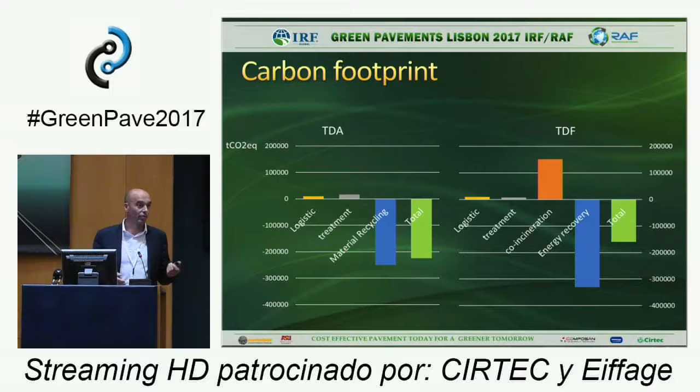So, looking at the asphalt market in Italy, as almost all over the world in the past decades, there have been several attempts with the dry process. Some of them were successful, others a complete failure.

But we can place the date of birth of the rubberized asphalts in Italy at the end of 2007 and early 2008, when the first entrepreneur in Italy decided to invest into blending units and start producing industrial rubber. Since then, we have some rubberized asphalt pavements, and unfortunately, 2007-2008 was not a lucky year to make that investment because of the forthcoming financial crisis that put to an end almost all the works and the investments in infrastructure in Italy. So also because of that, after 10 years, we have just roughly 350 lane kilometers of rubberized asphalt pavement. That's just very little if you think about that.

Anyhow, in the most recent years, the main driver for the market is the need for reducing the noise emissions along the streets and along the roads, and so noise reduction is the main driver for the market. And that's why also several companies now are promoting and placing on the market their own mixtures and hot mixes and products, rubber-based products that aim at reducing the noise emissions on the road.

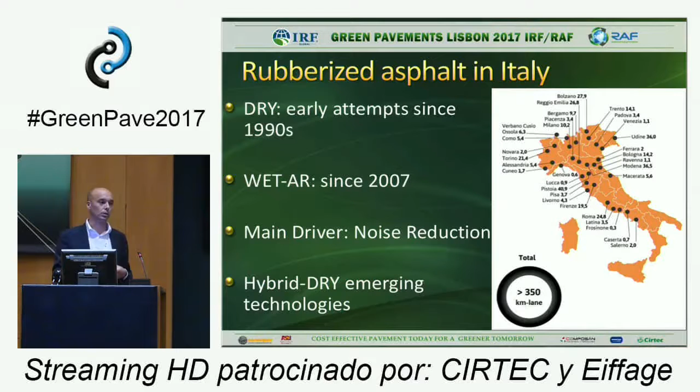And especially a hybrid dry technology is emerging and is spreading, replacing in several places the old wet technology. So the hybrid dry means the use of polymer modified bitumen and fine powder in a dry way. So, as I said, honestly, in an ideal world, I would prefer to have a decision maker that takes decisions not only based on the need of the noise abatement, but in a cathedral thinking way. I mean, looking at the life cycle and cost assessment of an investment.

And so that's why we took the opportunity to commission to a laboratory the assessment of the state of service of one of the first roads made with asphalt rubber in Italy in late 2007, early 2008. That was a successful story in a way, an Italian successful story, because at the time between the tendering and the execution of the works, the price of the bitumen had skyrocketed, and the contractor could not provide to the administrators the right quantity of conventional hot mixes without losing money.

And so at that time they decided to change the original design that was a conventional one, a very thick one, 25 centimeters of hot mixes, and proposed to adopt completely the asphalt rubber philosophy, and so they used thinner layers, 7 centimeters of gap graded hot mixes, plus a stress absorbing membrane interlayer with rubberized asphalt on top of a cold recycled base layer.

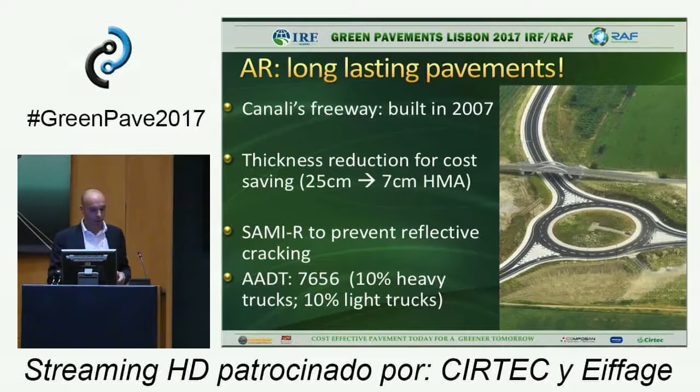So that way the company could make some little profit also on that work, and even though they didn't care about environmental sustainability at that time, the further calculation made it evident that 40% of the CO2 reduction was achieved by reducing the quantity of materials that were used, new aggregates that were not used, and so forth. So on the left hand you can see the new rubber-based design in comparison with the right-hand column that described the original design that was a very thick one.

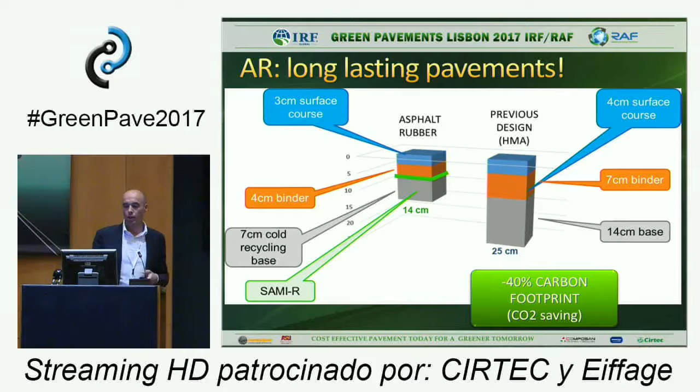So as I said, after 7-8 years we went back there in order to monitor the state of service of that road, and here you can see a picture of how the top layer of the material looks. Also today the mastic is still quite evident. It seems quite a new road, and in fact there was no cracking, no rutting, so the Americans were not telling tales, it was all true, all real. And based on the mechanical analysis of the samples that were taken, and falling weight analysis and skidometers and things like that, the performance was similar to that of a new road, so excellent.

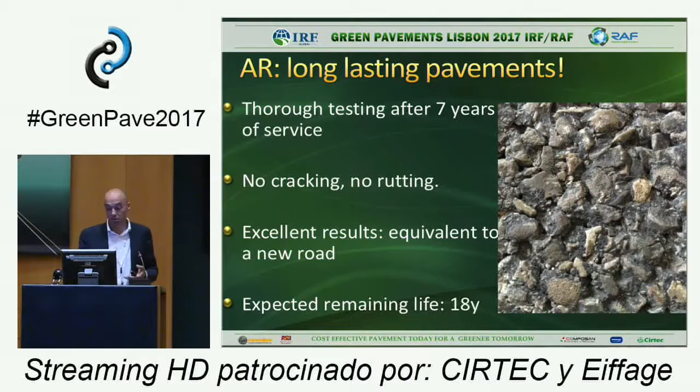And based on all the results, the mathematical modeling allowed us to estimate a remaining lifetime of 18 years without the need of further maintenance. That's a good success. In terms of energy and CO2 emissions, it was an environmental success. But I would also like to point out that it allowed a company not to lose money, but to make some profit. So it can be a profitable solution also in the short term, allowing the building of durable roads.

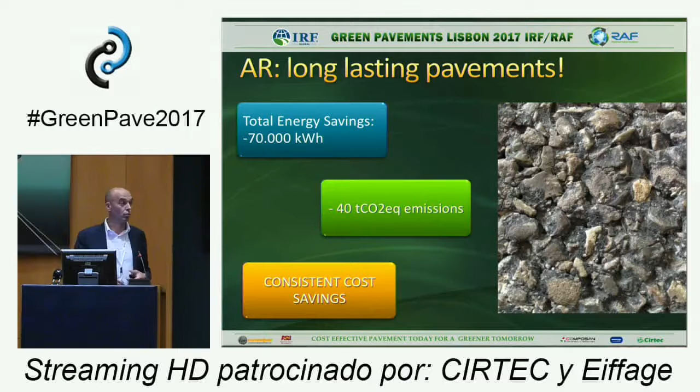So, as I said before, it seems that the decision makers are not fitted with a long-term vision right now, and they are not taking too much into account the durability of the roads, but they care more about the noise emissions nowadays. And so that's why 7 years ago we launched this broad program of monitoring of several road testing sites, and we still have 40 sites under periodic control, annual or semestral, it depends, and we made both close proximity index analysis and statistical pass-by ones, in urban roads and in highways.

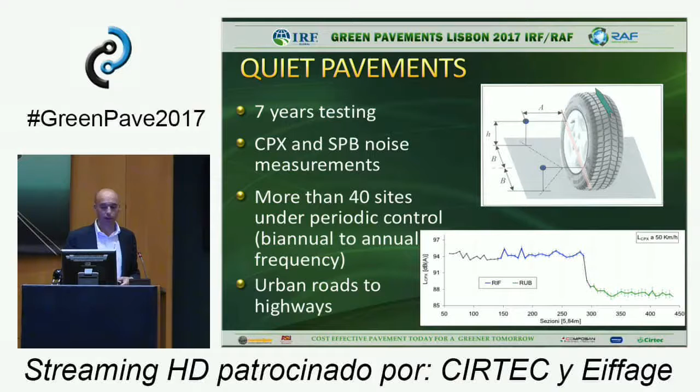And of course, if the design of the top layer is made properly, the noise emission is lower, but I must say that we could achieve the same results with any other material, probably, because the dimension of the aggregates is key, the texture, the roughness of the top layer is key in the noise reduction.

But the rubberized asphalt performs well also in the long term. It means that the rubberized mastics keep the stone aggregates in place so that the texture doesn't degrade over time, and so the efficiency of the quiet pavement is more durable than all the other technologies that we have referred to so far.

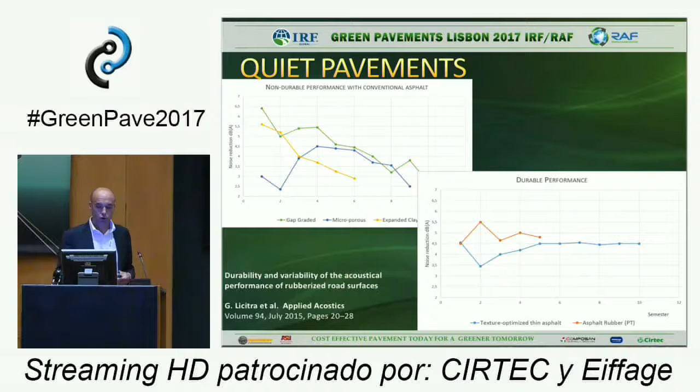So also the fact that a quiet pavement can be produced with a rubberized asphalt is true, and that's why our latest technical dossier in our free library deals with the technical specifications for producing quiet pavements, either with a dry process, wet process, hot temperature, or with a warm mix asphalt.

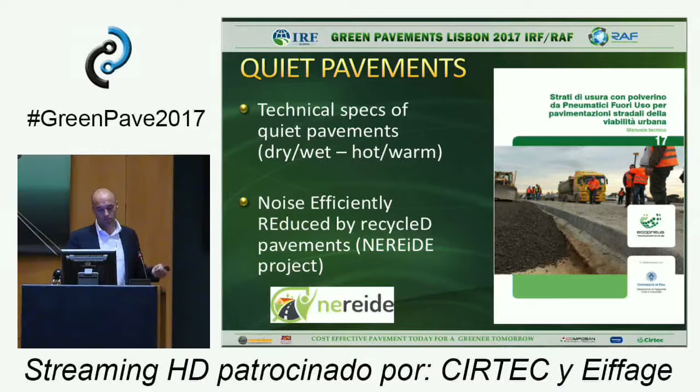And that's also why we are a partner in the LIFE NEREiDE European project aimed at reducing the noise by at least 6 decibels by using a lot of recycled material, either RAP and powder. So we launched that project just a few months ago, and the first outcomes will be ready in 1 year, I would say.

Finally, as I said before, I'm always trying to develop the market in Italy, and so I deal with the decision makers, the national authorities, the regional authorities, and unfortunately, I must say that the competition usually says that it smells of rubber, so it must be toxic, in order to get rid of a potential competitor. That's very bad, and in fact, it's a rooted idea among many decision makers, and so we needed to prove that if the smell is different, it doesn't mean that it's more dangerous for human health.

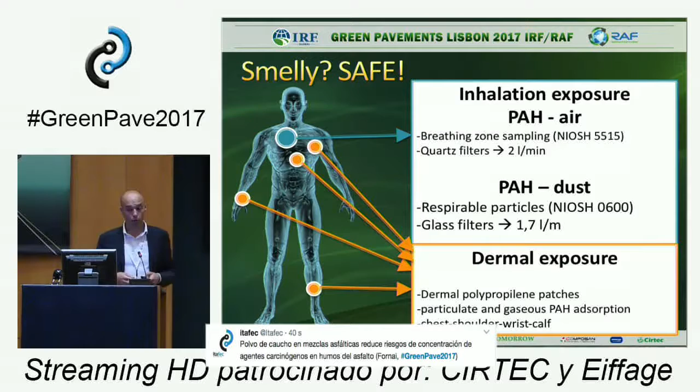So in 2014 and 2015, we launched this monitoring program, and we monitored several working sites, assessing the quality of the air, the environmental quality, and the air in the breathing zone of the workers, the screedman, the driver of the paver or the roller. Everybody was controlled so that we kept samples of the air with special pumps, but also we monitored the quantity of vapors that could condense and stick on the skin of the workers, so that also a dermal exposure could be assessed by our study.

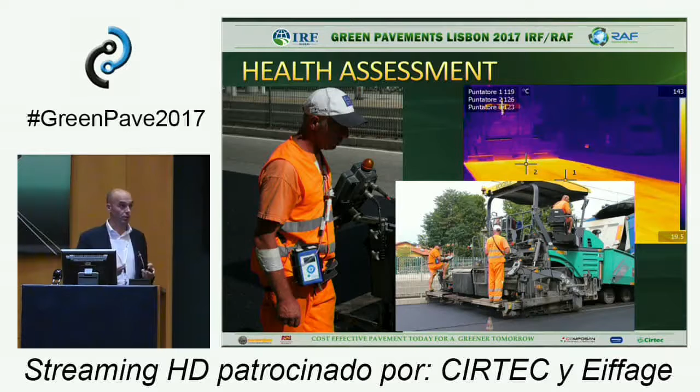So this is a picture that shows you the personal pump that was used to take the sample of air, but also this patch that was aimed at capturing the air and determining also the dermal risk. So we repeated this exercise several times, in working fields where rubberized asphalt was laid, but also with conventional asphalt. And I must say that the worst case that we found was in a site where no rubber was present. It was nighttime, and the temperature was skyrocketing. The blue smoke was quite evident also at nighttime.

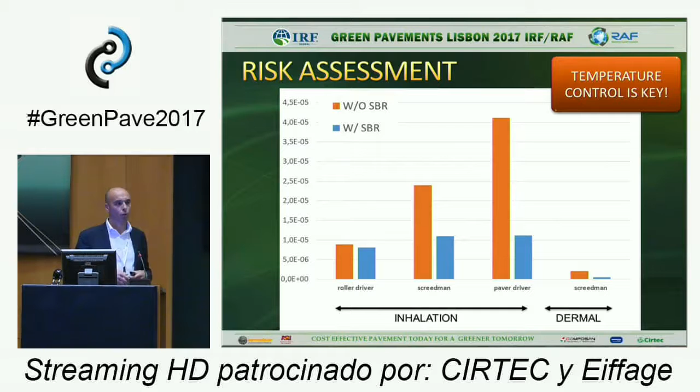At the end of this exercise, we assessed the incremental carcinogenic risk, with both conventional asphalt and rubberized ones. And based on our data, it seems that working at controlled temperature, so being at the same temperature, the concentration of PAH is statistically consistently lower in the fumes of rubberized asphalt than in conventional ones. The difference is not huge, but it is statistically consistent.

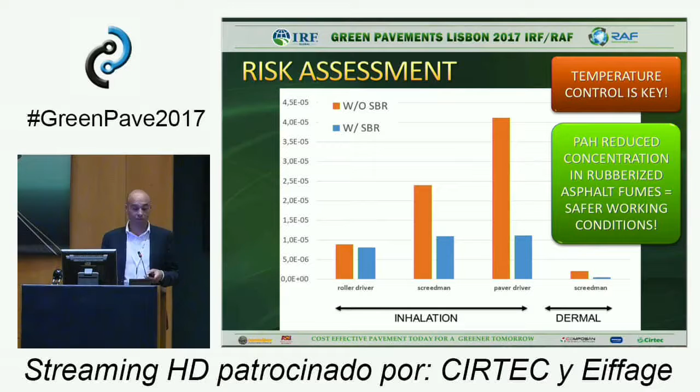So we can say that in the worst case scenario, the risk to which the workers are exposed on a daily basis while laying down a rubberized asphalt or a conventional asphalt is almost the same. So there's not really a difference. There is a difference in the smell, of course. The perfume of rubber can be perceived as a smell by many people. But the same could be said also for the bitumen perfume, but it doesn't mean that there's any different exposure to the polyaromatic hydrocarbons, so there's not an increased risk for human health.

So in conclusion, I must confirm what has been said too many times, probably, in these 2 days, so I won't repeat myself. I must just say that in general terms, tire recycling is good for the environment, but I would say also for the GDP of the country, because it creates jobs and it makes it possible to exploit the value of a material within the country, at kilometer zero in a local area, without compromising the safety of the pavement or the safety of the human health of the workers.